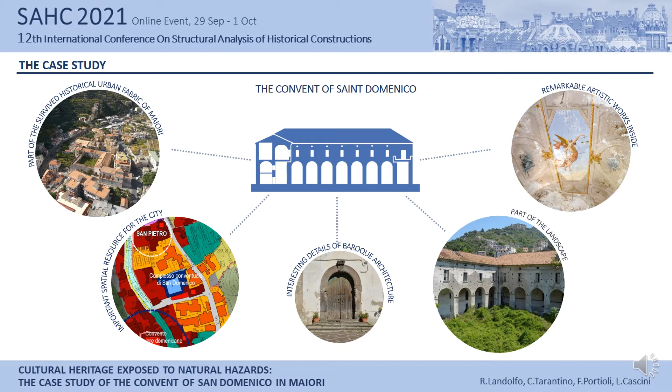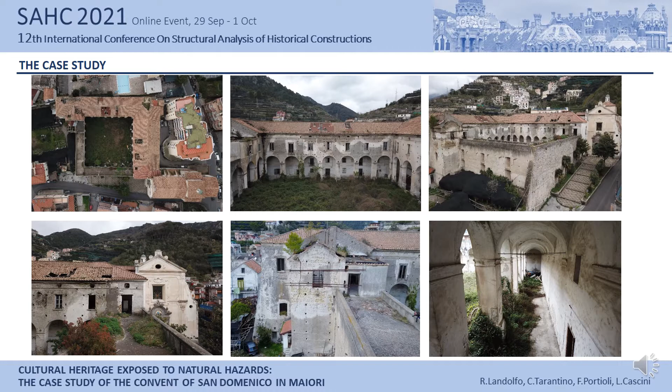Here are some few images showing the state of conservation of the building. It was abandoned since the 80s when a strong earthquake produced severe damage, and it has never been restored.

Our interest in this architecture was initially related to its exposure to multiple natural hazards. As a matter of fact, the convent is exposed to high landslide risks, to floods, and to earthquakes. For this reason, the building has been included as a case study within the framework of the research project Pericles, funded by the Italian Ministry of Education and aimed to develop sustainable strategies for the protection of cultural heritage threatened by natural hazards. This work is part of the study conducted within the research project.

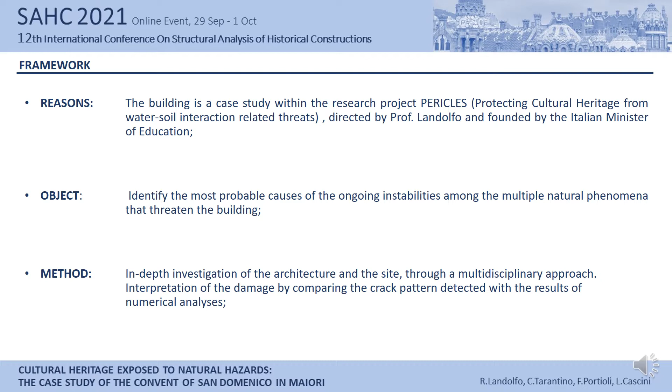So the object of the study is to identify the most probable causes of the ongoing instabilities among the multiple natural phenomena that threaten the building. We did it applying a multidisciplinary approach to study the building and the foundation site, trying then to interpret the damage through the comparison between the crack pattern detected and the results of the numerical analysis.

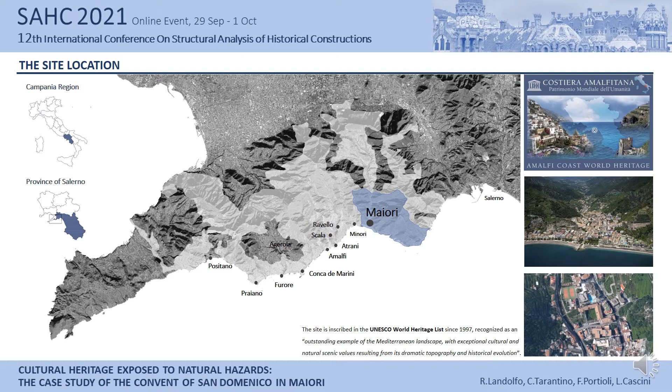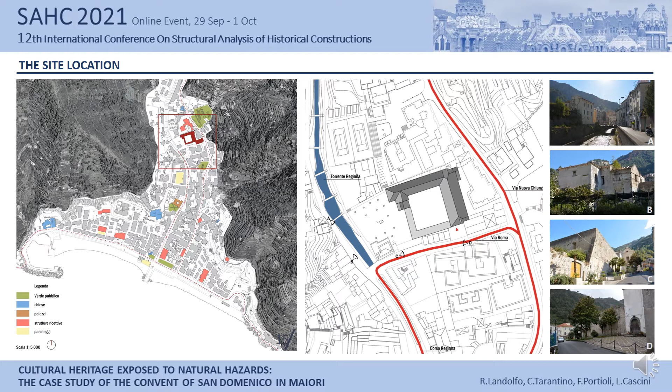The Convent of San Domenico is located in Maiori, a small town of the Amalfi Coast in the province of Salerno, Campania region, and it is a UNESCO site well known all around the world, inscribed in the World Heritage List since 1997. The building is located in the innermost part of the town on a flat area located in the immediate vicinity of the River Reginna, the watercourse that crosses the whole town and which certainly affects the mechanical characteristics of the foundation soil.

Looking now at the architecture, the convent is a porticoed courtyard building characterized by a complex plan configuration, which is the consequence of several manipulations and adaptations carried out during the centuries. It is composed of 4 bodies of different width and height, placed around a square courtyard of 32 meters side length. Two of them, the east and the north blocks, develop for 2 levels, while the last 2 feature a single above-ground level and only consist of a portico covered by a panoramic terrace facing the sea.

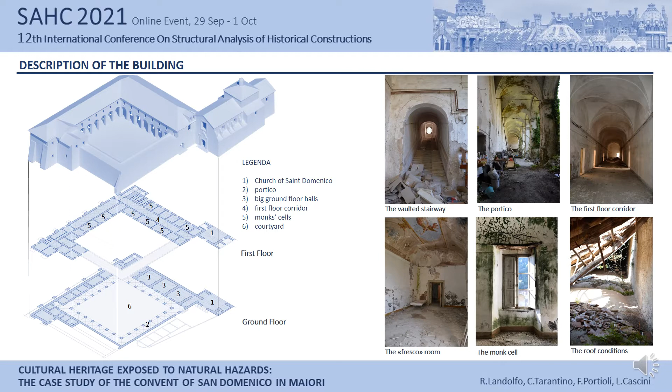At the ground floor, big barrel vaulted halls open off, while the south and west porticos have blind back walls. On the first floor, a long corridor runs the whole building and serves all the rooms, once being the monk's cells. The vertical connection was once granted by 2 stairways, but today only the one on the east side is serviceable.

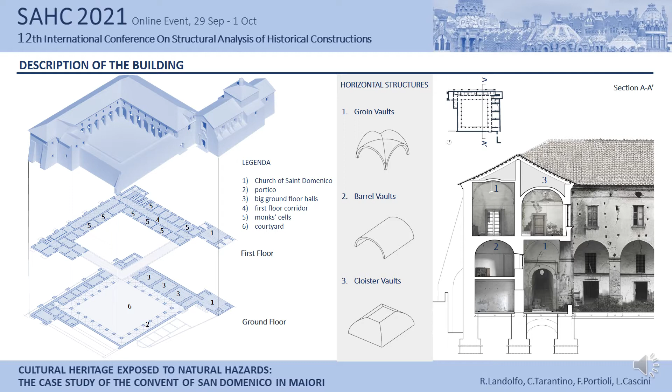The whole structure is in masonry. The thickness of the masonry walls ranges between 120 centimeters at the ground floor and 60 centimeters on the last level. The horizontal structures instead consist of a great variety of vaulted structures made of yellow tuff. Groin vaults span along the portico and the corridor at the first floor. Big barrel vaults cover the rooms at the ground floor, while cloister vaults roof the sequence of monastery cells at the first floor. The roof is made by a double-sloped timber structure covered by clay Roman-style tiles.

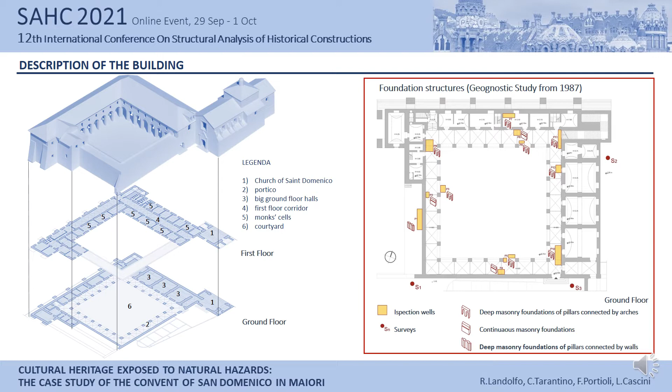Some detailed information about the foundation structures was made available by a geognostic study carried out in 1987. The foundations are dishomogeneous and placed on different laying surfaces, that's what we know, and we can find superficial continuous masonry foundations, deep masonry foundations of pillars connected by arches, and deep masonry foundations of pillars connected instead by walls.

Let me give you now a few historical informations. The construction of the building started in 1650 and it was long and complicated due to several structural instabilities caused by the poor quality of the foundation soils. In 1809, after the suppression of the religious orders, the convent was abandoned and left without any use for about 50 years.

In 1865, the local authorities acquired the whole building and settled inside three different functions: a courthouse, a jail, and a school. In some rooms of the building instead were already illegally occupied as houses by the locals.

Consequently, very invasive restoration works were carried out to adapt the old construction to the new functions. Lofts were created at the ground floors and new windows were opened in the bearing walls. At the first floor, large arched openings were created in the transverse walls to define the classrooms, enlarging the old monks' cells.

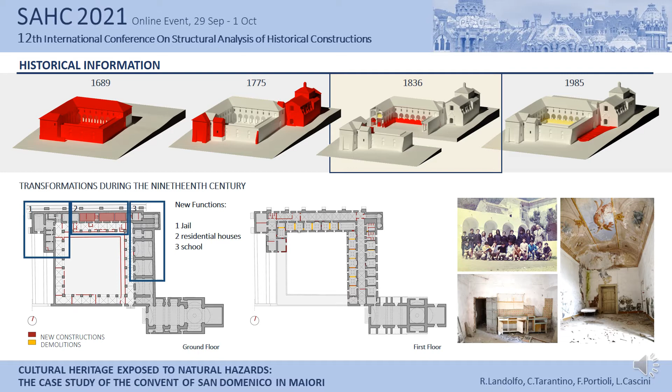In 1980, a strong earthquake heavily damaged the structures and the building was definitely closed and abandoned. In 1985, a new project of restoration was launched, but it was not completed due to the lack of funds. So nowadays, the building is still closed, abandoned, and in critical condition.

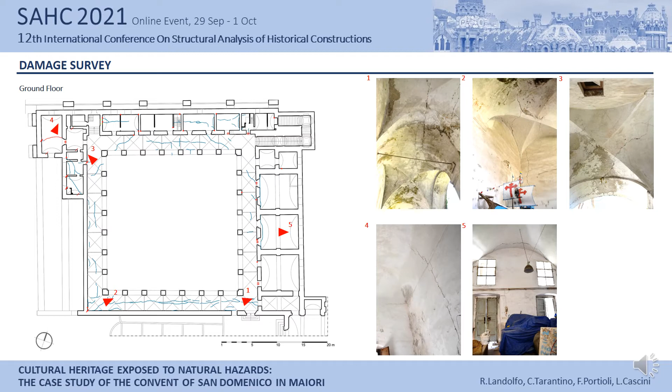In fact, it currently presents an extensive and diffuse crack pattern that is the consequence of several causes, such as the natural aging of material, the lack of maintenance, the modifications occurred during the century, the seismic events occurred in the past, and possible mechanisms related to the poor quality of the foundation soil.

The crack pattern increases in intensity and extent from the ground upwards. The groin vaults of the portico and of the corridor at the first floor show cracks in the center line at the attachment to the wall, corresponding to the typical three-hinged mechanism. The door vaults of the monks' cells exhibit diagonal cracks and multiple dense cracks parallel to the courtside wall.

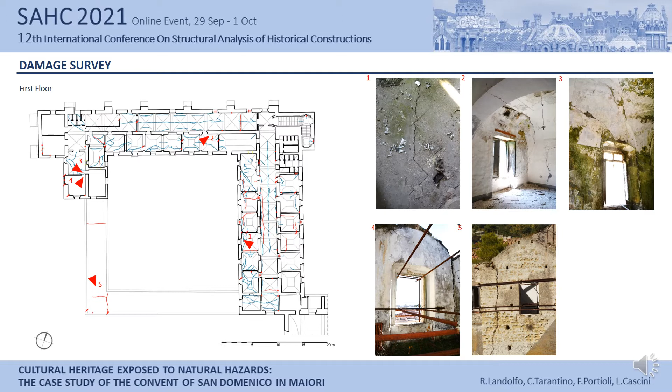As for the east wing, a different crack pattern is observed, which differs from the one observed in the rest of the building. In fact, the big barrel vaults of the ground floor halls are completely detached from the head wall, separating them from the court.

At the first floor, the door vaults of the monks' cells on the court side show a more complex and braided crack pattern. Parabolic fissures develop on the transverse walls and some cracks open out on the floors. A partial collapse of the roof can be observed at the middle length of the block, not referable to a break of the timber structure, which still appears in good conditions.

Moreover, the presence of subvertical cracks on the foundation arches in the southeast corner is reported by the geognostic study from 1987. So the interpretation of the crack pattern in this area of the building is not straightforward, as it seems to be the result of different phenomena that acted on the building together.

That's why a numerical model of a cross-section of this wing has been developed and analyzed under two different conditions: lateral loads and settlements.

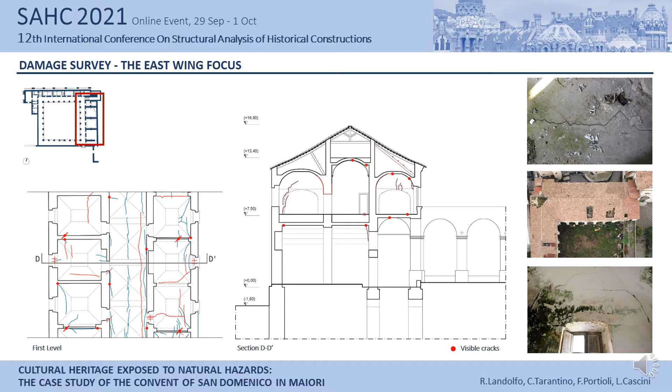The structural analyses were carried out using LiABlock_3D, an in-house software tool for the limit equilibrium analysis of masonry structures, modeled as an assemblage of three-dimensional blocky structures, which provides as output the most vulnerable collapse mechanism for a given loading condition. The software is based on a point contact formulation and implements the lower bound problem of limit analysis. The numerical model is an assemblage of rigid bodies interacting with one another through no-tension friction contacts characterized by infinite compressive strength.

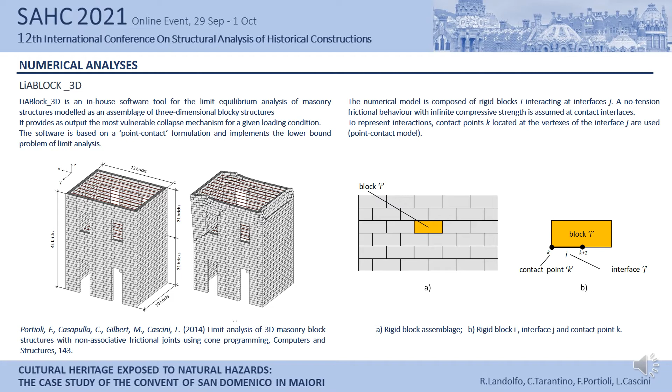The model of the east wing was developed considering a characteristic transverse section, which is representative of the whole wing, considering the modularity of this part of the convent. The section is obtained in correspondence of the symmetry plane between two consecutive spans of the portico and includes the most relevant structural elements of the wing.

To solve some modeling issues deriving from the gap between the two-dimensional model and the three-dimensional conception of the construction, special components were created. It is the case of the sub-arch of the ground floor barrel vault, which develops in the orthogonal direction of the plane considered in the analysis. A support block has been introduced in its place to sustain the left wall of the first floor corridor.

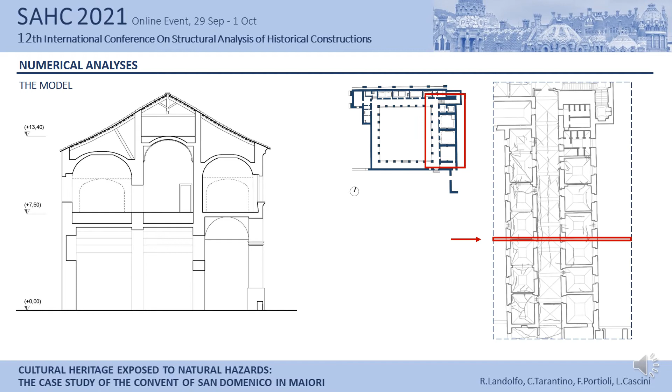The model is composed of an assemblage of 685 rigid blocks. The discretization of the structure in rigid blocks does not reproduce exactly the real masonry texture, but was defined so as to reproduce the average size of the real stones. A refined discretization was adopted instead along the arches to enable the free formation of the hinges required by the collapse mechanisms associated to the imposed actions.

Additional data were required by the software LiABlock_3D for the analysis, and they are related to the material properties. So the weight per unit volume of the masonry was assumed equal to 21 kilonewtons per cubic meter, and the value of the friction coefficient was set equal to 0.6.

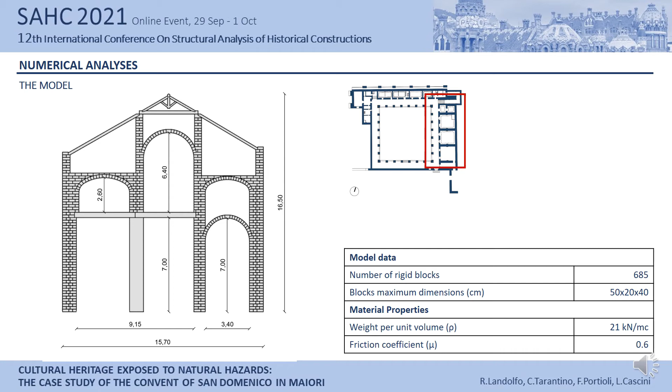The numerical analysis for lateral loads has been carried out by applying a set of lateral forces to the centroid of each rigid block, acting along the x direction in two opposite directions. The figures show the collapse mechanisms corresponding to the non-associative solution of the two in-plane seismic analyses, in the positive and negative x direction respectively.

When the load acts in the x-positive direction, the collapse condition occurs for a low value of the load factor, as you can see in the table. The overturning of the courtyard facade is activated, and as a consequence, a typical three-hinge mechanism develops in both the round and the low arches of the right span of the section. The mechanism also causes the sliding of the timber beam and thus the roof collapse.

When the load acts in the x-negative direction instead, the load factor needed for collapse is higher. The left and the middle spans of the section almost behave as a unique block, overturning and causing serious damage visible in the right span of the section.

The global damage of the seismic in-plane analysis is partly compatible with the surveyed crack pattern, as expected since no restoration works have been done after the earthquakes. But it contemplates only a slight damage of the innermost structures of the section and doesn't detect the floor cracks at the first level.

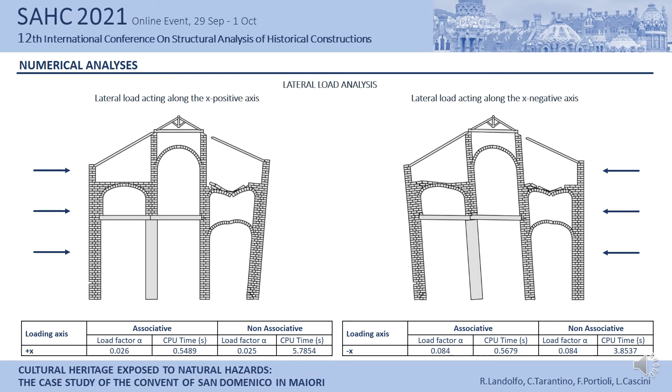So we went on with the settlement. Based on the localization of the cracks and the damage traceable to a potential soil failure, two different schemes of ground vertical displacement were implemented. The first considers a uniform vertical displacement imposed at the base of the portico's pillar in point A. The second examines the case of the same movement imposed at the base of the portico's back wall in point B.

Looking at the first settlement scheme, the failure involves only the first span of the section on the portico side. The collapse occurs with a three-hinge mechanism in the ground floor arch and a two-hinge mechanism in the low arches at the first floor. The overturning of the portico's pillar and the sliding of the roof's beam are also consequently triggered.

Observing instead the second settlement scheme, we can see that the damage affects the whole structure. The collapse still occurs with a three-hinge mechanism in the round arches of the portico and of the upper floor corridor, while a two-hinge failure mode develops in the low arch of the transverse wall.

This again results in the overturning of the portico's pillar and the sliding of the roof's beam onto the first span of the section. The mechanism slightly affects also the last span of the section due to the possible little movement provoked in the barrel vault.

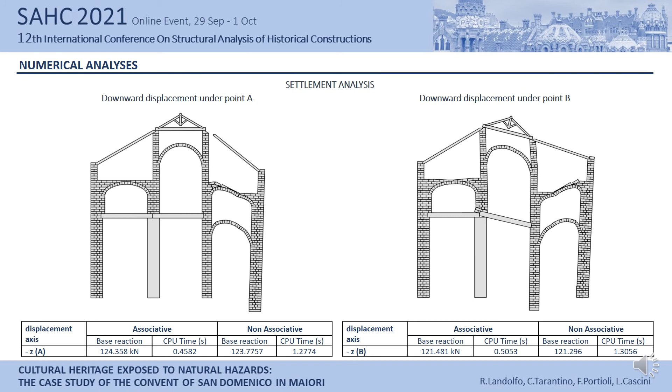Between the two collapse mechanisms predicted by the numerical model, the second one, corresponding to the B settlement scheme, is in good agreement with the surveyed crack pattern.

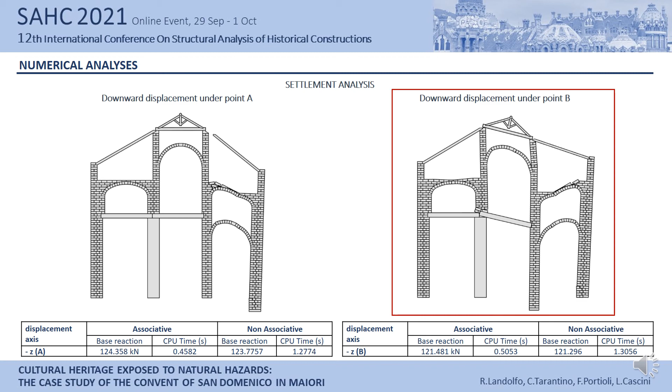As we can see, looking at the section here represented and reporting the damage survey, the mechanism catches almost all the existing cracks. At the ground floor: the barrel vault detachment from the head wall on the portico side in lesion A, and the cracks in the covering structures of the portico in lesion B. Also at the first floor: the cracks in the vaults and arches of the corridor, at the floor, in the transverse walls of the right room, and the failure of the roof too.

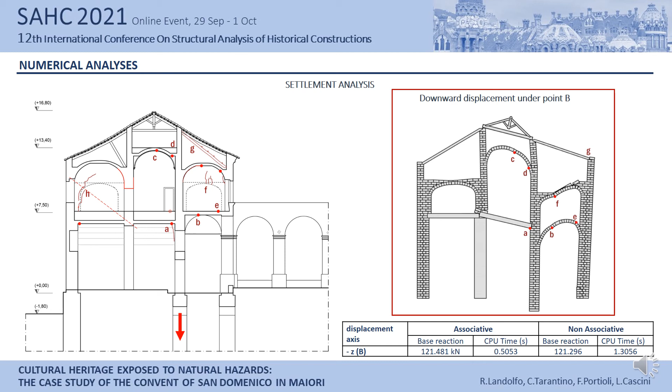To conclude, the damage analysis of the Convent of San Domenico has been presented. We adopted a multidisciplinary approach to study the building from a historical, structural, and architectural point of view. We derived some information from a geognostic study, and we did an accurate geometric and damage survey.

On the basis of this information and data, we identified the most probable causes of the ongoing instabilities, and we verified them by using the software LiABlock_3D. We made two types of analysis, one for lateral loads and one for settlements, and the results of the analysis are in good agreement with the detected crack pattern, and provide new important elements to identify the causes of the instabilities.

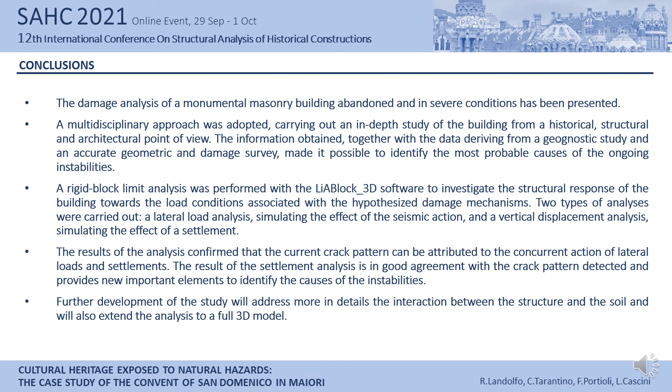Further development of the study will address in more detail the interaction between the structure and the soil, and will also extend the analysis to a full 3D model. Thank you for your attention.